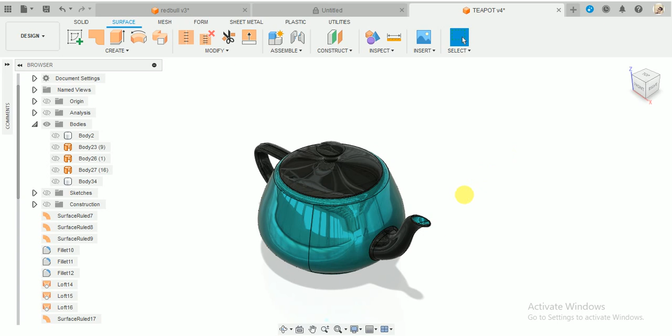In this video tutorial we are going to show you how to make this beautiful teapot assembly in Fusion 360. This comes with the lid and the vessel itself.

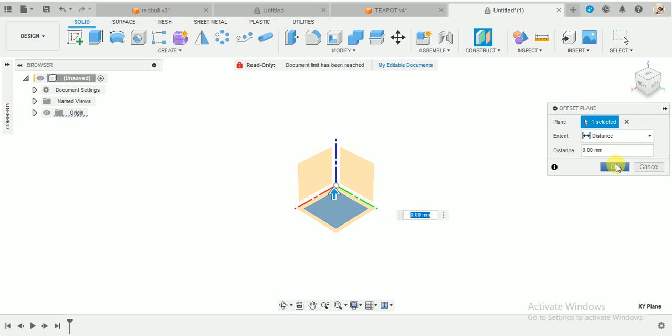This is the origin here. Now we are going to create 9 different planes from the bottom plane. First, go to construction, go to offset plane, select this one. We will create the first plane at a distance of 0 mm. So this is going to be our first plane. Now we can hide the origin.

Now we will repeat the same step. Select this plane upwards and offset it at a distance of 4. Now we have plane number 2. Repeat this step, selecting plane number 2 this time, with the offset distance of 6.

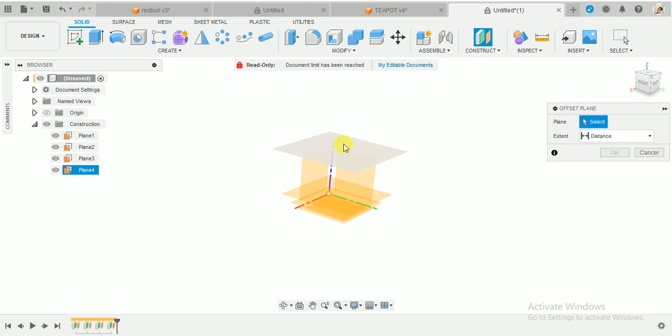Keep on repeating the same step by selecting the last created plane. The fourth plane that we will create would be at a distance of 30 mm, and repeat the same, with the distance for the fifth plane also being 30. For the sixth plane, the distance is going to be 35. For the seventh plane, the distance is going to be 18. For the eighth plane, the distance is going to be 15, and for the final, ninth plane, the distance is going to be 5. Press OK.

Now we have 9 different planes. We need to create 9 different sketches on each of them. To avoid confusion, I will hide all the planes and start with plane number 1. Click on create a sketch and click on plane 1. Now press C for circle and make a circle at the origin with a diameter of 91, and finish the sketch.

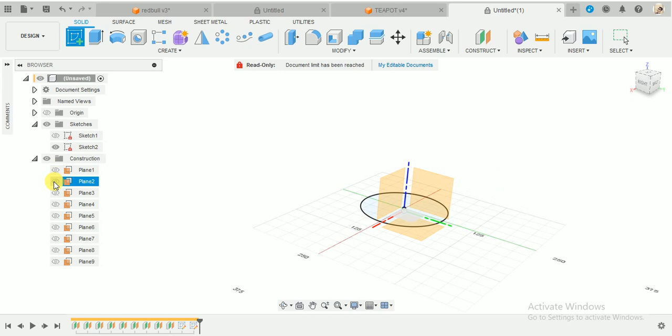Hide this sketch. Now click on plane 2, press C for circle, and this time the circle would be of 143 mm diameter. Finish the sketch again, create a sketch, and this time choose plane 3. Repeat the same step; this time the diameter would be 153. Finish the sketch and hide the third sketch.

Choose plane number 4, press C. This time the diameter would be 200 mm. Finish the sketch. Similarly, keep on repeating the same step; this time the diameter would be 178. Finish the sketch again.

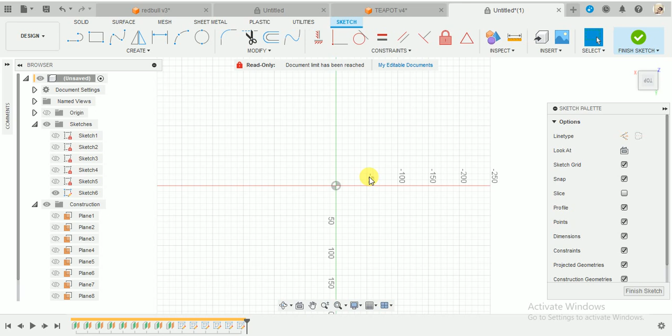Go to plane number 6, repeat, and this time the diameter would be 135. Go to create a sketch on plane number 7, press C for circle, the diameter would be 17. Hide this 7th sketch. Place on plane number 8, press C again, this time the diameter would be 36. Finish the sketch. Now go to the last plane, plane number 9.

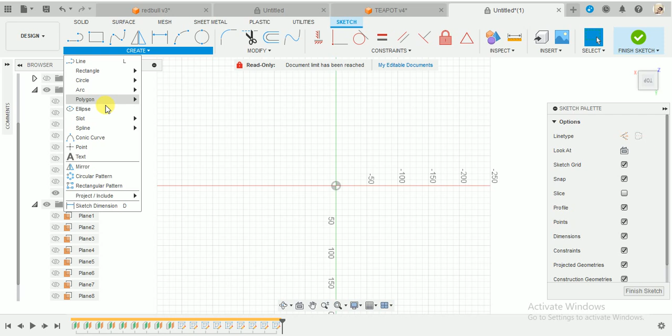For plane number 9, we are not going to create a circle, remember guys. So for the 8th plane we created circles of different diameters, but for the 9th plane we are just going to make a point at the origin and finish the sketch. Now let me bring back all the 9 sketches like this, and you can hide all the planes since it's not necessary for now. Now we have 9 different sketches at 9 different planes; this is basically the intersection, the cross section for the teapot.

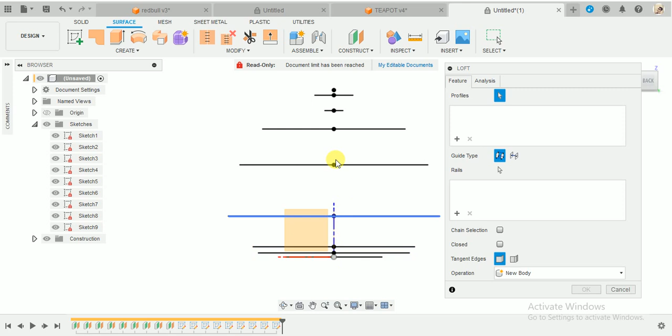Now the magic begins. Go to surface, go to create, go to loft, and to avoid confusion we will not make a loft surface by selecting all the cross sections at once. Instead, we will keep on going one by one. Select the topmost, bottommost, and the circle just top of it like this. This will create a surface like this. Now what you need to do is make sure for the first profile that it should be connected, and keep it for the second plane as well, and make sure it's selected as new body, and press OK.

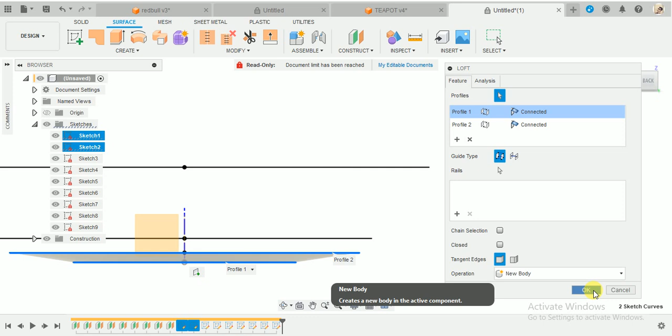Now once done, repeat the same step, loft, for the second and third profile, but this time for the first profile that you have selected here, make it tangent. So the surface being created is tangent to the first surface we created. This is necessary, and you can also play with the tangency. It's up to you how to handle the tangency. This is the line, you can adjust it as you want.

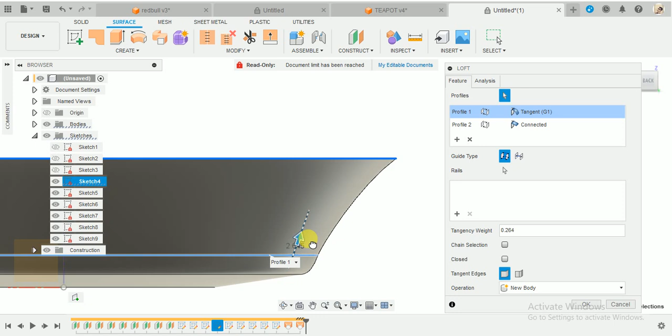Click OK. Now once done, we will repeat the same process for the third and fourth one. Make sure the first profile is again tangent to the last one like this. As I said, you can play with the tangency as you want. I think this seems better. You can edit it at any point.

In your design, as you can see here, the profile is now bending towards the inner portion. Now we are somewhere here. The curvature will go towards the inside. So now what I'm going to do is just click on the last loft and edit the feature.

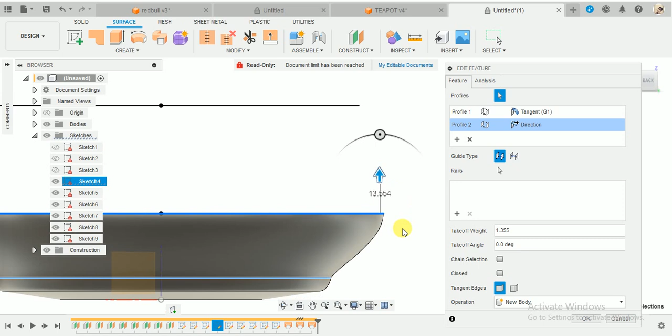For the second profile, the top profile we created, instead of connected, let's select the direction here, and the direction here. This will give another tangent relationship, but with respect to the direction of the arrow. Make sure the arrow is pointing upwards so it provides a beautiful curvature here. Once you are satisfied with the curvature, press OK. This is how it will look.

Now again, go to create, go to loft, and select this profile and this one. Remember, the first profile will be tangent. You don't have to worry about the second profile; it will automatically get tangent to the next surface. Click OK. Now you can see how it is going.

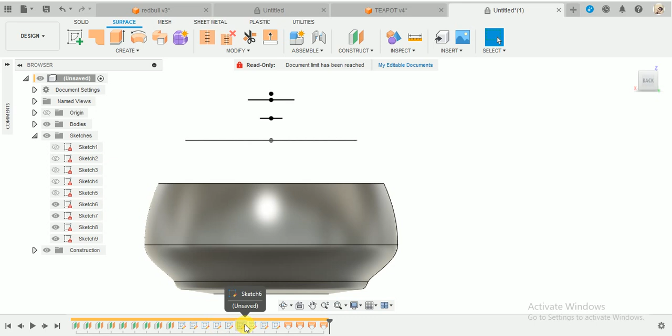You can also, whenever you want, play with the tangency weight if you're not satisfied with the curvature. Similarly, you can edit the diameter of the circles of any cross section if you want to change the design of your pot at any time. So go to loft again, select this one and this one, make sure the first profile is tangent, and press OK.

That's it. So now we are at the topmost section of the pot. We are here. Now the top three sections are for the lid. For the bottom vessel, this is all we wanted for now.

Now we are going to use the stitch surface, because as you can see here, if I go to bodies, these surfaces are not yet connected. They can be seen here as different bodies. So we are going to stitch them together. Select all the surfaces you have created, make sure it's set to new body, and press OK. Now you can see that all those faces have been stitched together. Now we only have one body here.

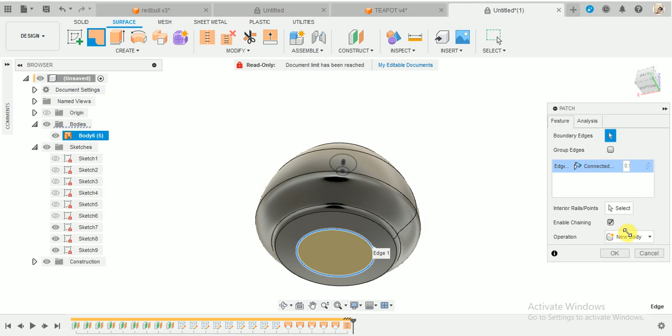Before moving forward, we need to close this hole below. So we will go to create, go to patch, select this one, and click OK. Now repeat the same step. We are going to stitch this patch with this body and press OK. Now we have a single body here again.

Now go to modify, select fillet, and give a fillet here so that we have a smooth surface, a curvature, sorry. It's up to you, you can play with the radius. I think this seems okay. When you are satisfied, press OK. Now that will be our base. The base should be exactly flat. So we are done with the base here.

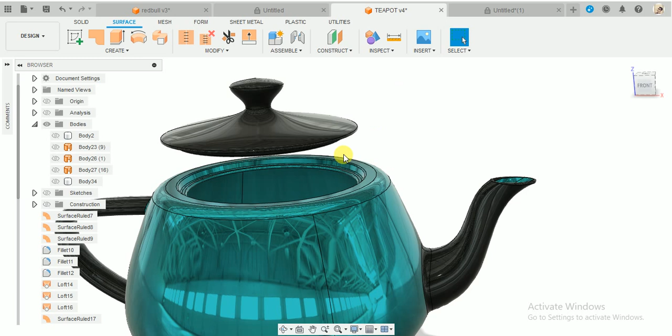Now what I'm going to do is, if I show you the cross section of my top here, you can see we have a small section used for resting this top lid. So we are going to create this cross section in our pot itself. But as you see, we are not in solid workspace, we are in surfacing.

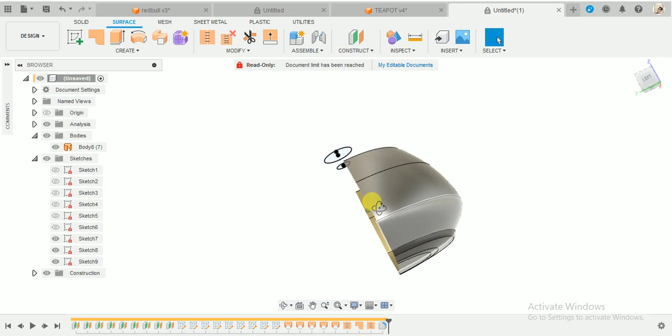So now what we are going to do is go to inspect and create a section analysis, so that we can get a section on the front view, and press OK. So now it's been sliced. I've just done this to get a better view of the internal profile, to see how we are working on the internal profile.

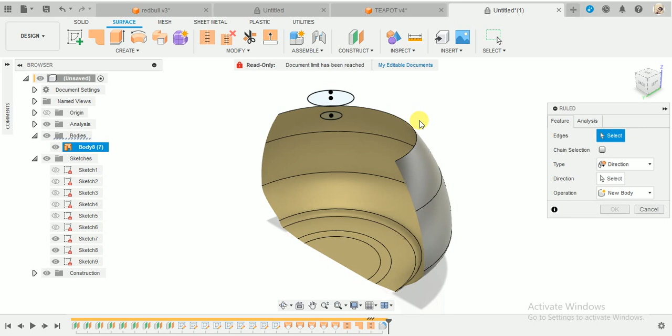So now what we will do is go to create, and go to ruled surface, select this surface, and again click on ruled surface. Select the edge you want to make. Okay, something might be wrong, I don't know. Okay, let me just switch off the analysis.

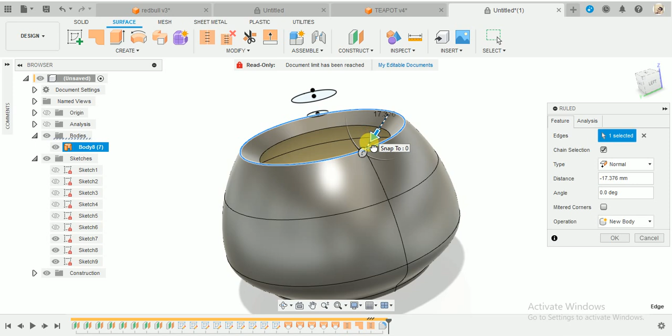I think there might be some issue with the command here, maybe a glitch. Okay, yeah, I get the point now - the direction was selected instead of normal here. So what happens is we will be creating an inside surface, but we will make sure that surface

Okay guys, I don't know why, but this previously worked when I worked on this. So let's choose the tangent. I don't know why in direction it's not generating the surface. Maybe something is wrong with the system, or maybe I messed up something. So let's go to normal only for now.

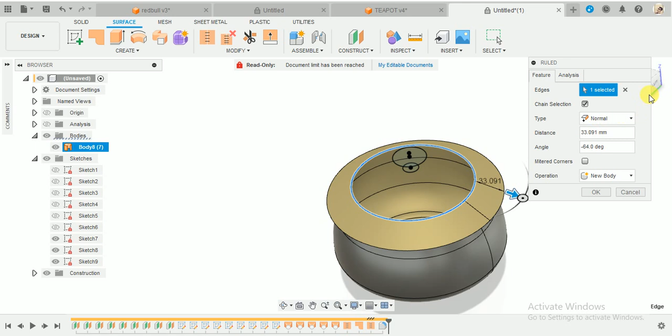Now make sure that we are creating the surface inwards. You can switch on the analysis that we have just created. Now you will know why we have sliced the cross section here. Now go to front plane.

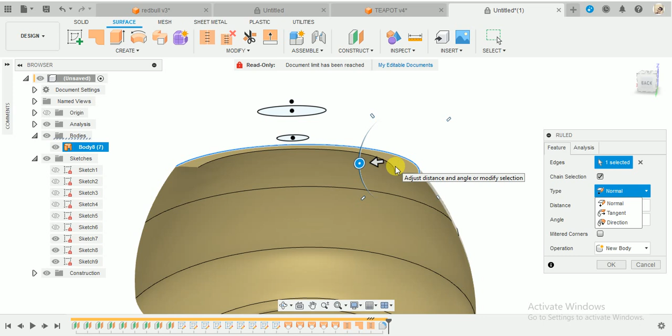Now make sure the angle is just parallel to the ground. So like I told you, I don't know why this direction feature is not working - this is supposed to do with the angle. If this was working, we could select the z-axis or y-axis for reference, and then directly select 90 degrees to that, so we'd be confident this surface is parallel to the ground. But since it's not working, we can check our suggestion.

I think this looks pretty good. Now for the distance, of course I'm not going to use any particular dimension here because this is just up to you, so you can play with the dimension. For now, I think 7 mm looks fine. Since we are in inverse, this would be -7. Let's go with 8 - yeah, -8 looks good.

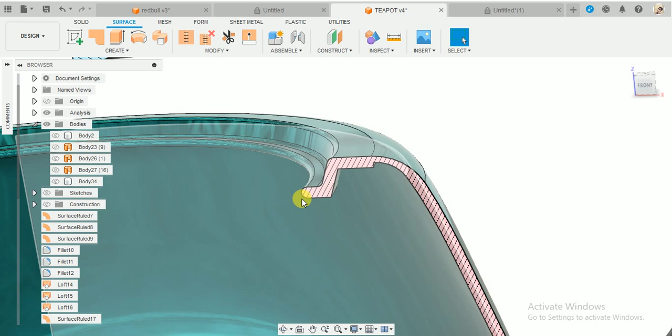Once done, you can always disable the analysis if you are getting confused here. So we have a surface here. Now again, if you look here, we will go downwards, and then create another step so that the top lid could rest here.

So again, for that, we will go to create, go to ruled, select this one. This time the angle would be downwards, and make sure to give it a little bit of draft, instead of making it 90 degrees, give it a little draft. You can also play with the length. Let's say we should go with -6.5. Seems okay, yeah this seems okay, and press OK.

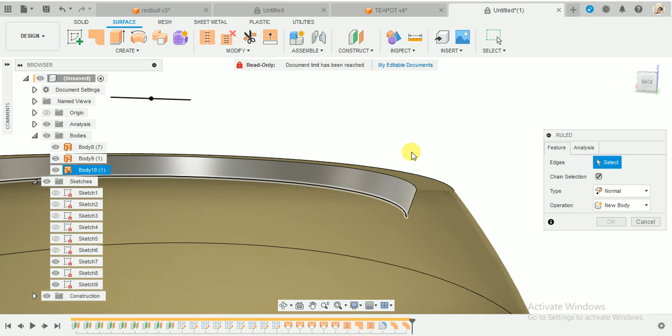Now we will create another step. Go to create again, go to ruled again, select this one. Again do the same step. This time again we will be doing the step at 90 degrees, parallel to the ground. Let's see if that direction feature is working this time - I'm not quite sure whether it will work or not.

Oh yeah, it's working. Now I don't know what happened previously, but now you can see the direction feature is working. We have given the z-axis as reference direction, and we have created an angle of 90 degrees. So now we are sure that our surface is 90 degrees to that.

Now as for the distance, you can see it's not that much, so we will go to edit feature and make sure the angle is 90 degrees. You can play with the distance here. So I think we will make it -5 mm. Yeah, 5 mm would be okay, and press OK.

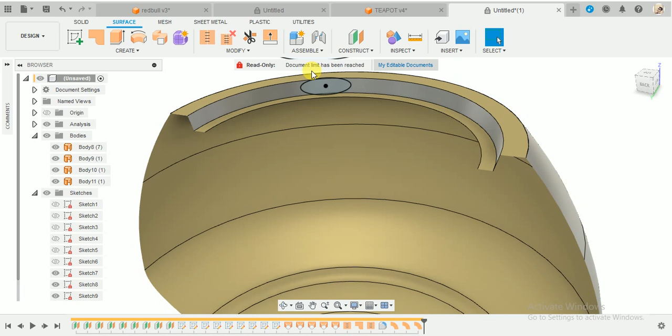Now we can switch off the analysis for now. This seems okay. Once you are satisfied, you can stitch all the surfaces, all 3 surfaces that you have created with the original body, and click OK. Now we have a single body again.

Now for the next step, before moving on, make sure you give fillet to all the edges that you have created. Again, I'm not going to give any dimension, it's up to you how much smooth you want. I think this seems okay, and similarly do this for the inner edges as well.

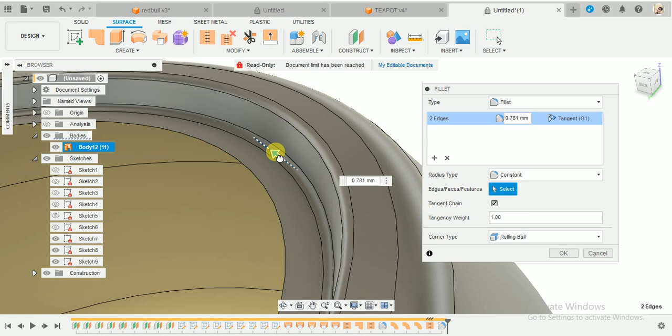Yeah, I think this 0.781 seems okay, and press OK.

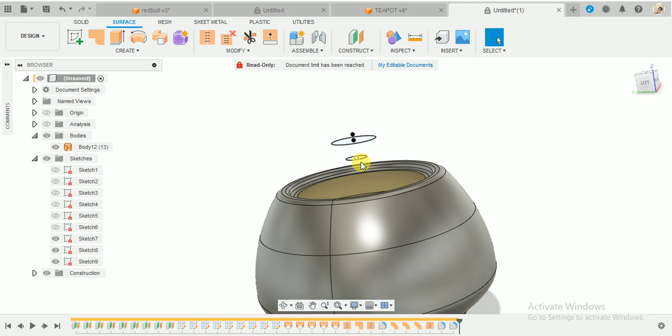Once done, we will start working on the top lid. Now these are the 3 sketches that we have created from the total 9 sketches. Make sure this is the third from the last, so we are going to highlight the 4th from the last. This one, this sketch was the topmost section, so basically this will be the bottommost section for the top lid.

So now what we are going to do is select loft, select this one and this profile like this.

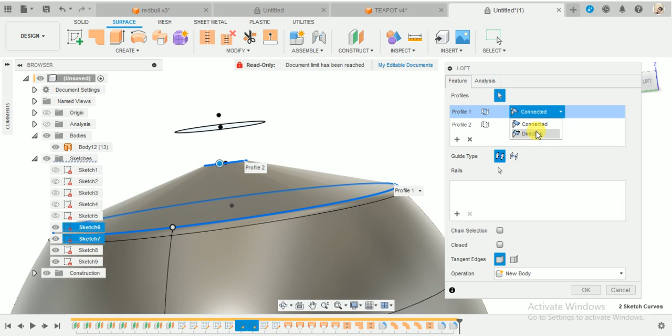Now for the first profile, instead of tangent, because there is no surface below it, we cannot choose the tangency. So we will choose the direction instead, and again we have the arrow, so you can play with the cross section as you want. This seems okay, this seems fine to me.

Similarly for profile 2 also, we will be selecting direction upwards, and you can also play with the profile here. This seems okay. I'm not going to go in detail.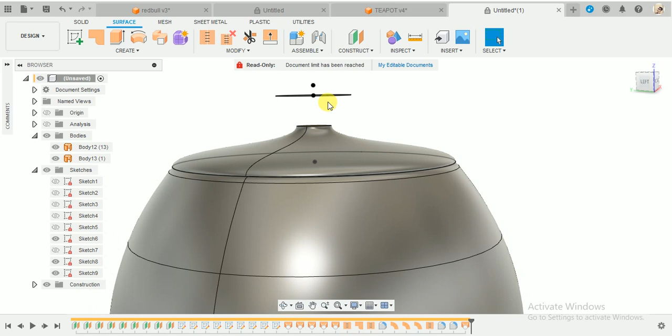Let's repeat the same step again. Go to loft, select this profile and this one, and as I told you, the first profile is going to be tangent because we have a surface below it, so make it tangent. For the top portion, I think I will keep it like that, or let's try direction. Let's see how it looks. Yeah, this looks fine, it's up to you.

So you can again play with the tangency here. Once you are satisfied, press OK.

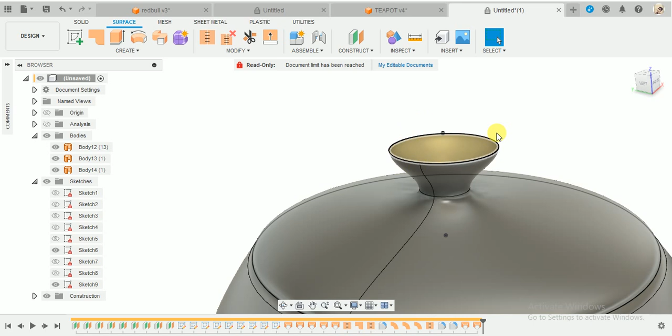Now for the last portion, for the tip that we are going to create here, as you notice we have not created any sketch because we need to close the loop here. So go to loft, select this profile, and instead of selecting the upper profile, select this point and it will close the loop. Again, select this at tangent and play with the tangency as you want.

The second would be the sharp or the point tangent. It's up to you, so I would recommend doing the point tangency, as this will create a much smoother surface than anything else. Again, if you switch to side view, you can play with the tangency weight here. When you are satisfied, click OK.

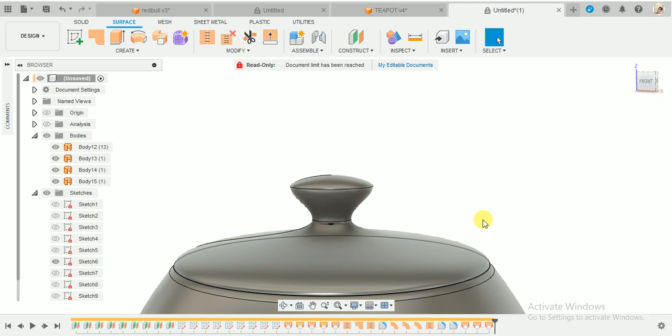Now you see we have our lid here, and we have our base surface, our base body. So now we are going to stitch the top three surfaces that we have created, and we have two different bodies. Now for the surface, as you can see here, we will again be creating some textures here in order to make sure it fits on top of that.

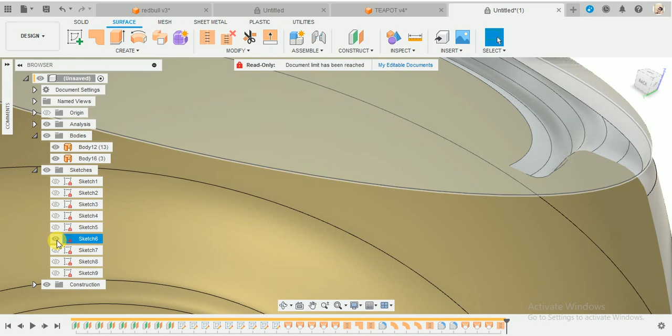So again, go to analysis and switch on the tangent section analysis that we have created. For the sketch, you can hide it, we don't require them for now. Now again, we will repeat the same step as we did for the bottom part.

So we will again go to create, go to ruled surface, select this face, and let's see if direction is working this time. Hopefully it works. I think it's working. Yeah, direction is working, so we are going to make the angle 90 degrees. Let's switch to...

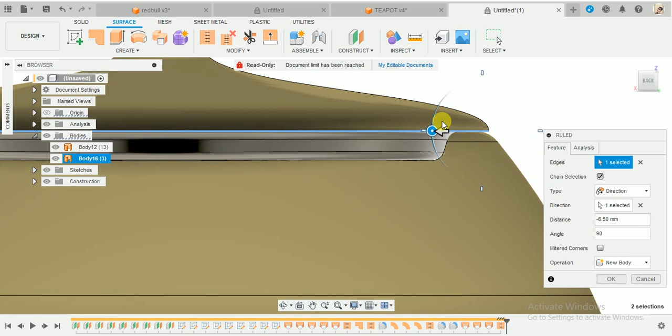You can make sure it does not collide with the surface that we have created for the bottom one. I think this seems okay. Just make sure there is some gap between, just for clearance, if you are planning to 3D print or something like that. So make sure it goes like this and press OK.

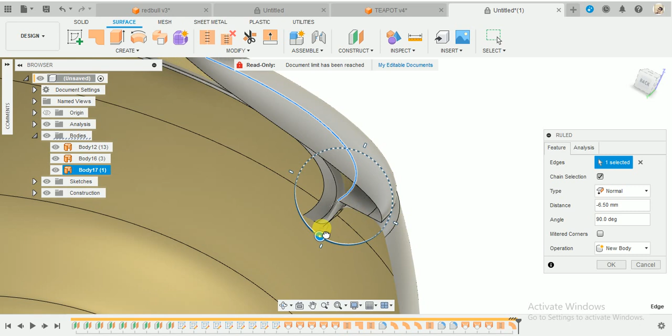Make sure it's a little bit extra, and go to create again, go to ruled surface, select this one. For the direction, it is not necessary, just go to normal for now because we are going to make an angle surface. Doesn't matter. Go to side view.

It will give you a nice idea of how long the surface should be. Now once done, you can play with the length. You can choose it till here, or you can leave it like that only. So I will leave it till here and press OK.

Now select and just hide the bottom one for now, and now you can see that we have created the inner section here. Now go to stitch, select this surface, this one, and the top body, and press OK. Now once satisfied, you can switch off the analysis mode for now.

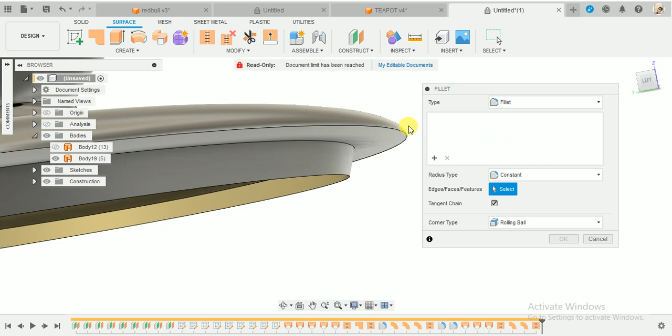Now we have a body here again. Now let's get to this body again. We will give it some fillets. So it's not about the dimension, it's up to you. Let's go with this fillet.

Repeat the fillet for this edge. Just make sure it does not collide with the bottom one. So let's switch on the analysis once more. Yeah, this seems fine, and once you are satisfied with the radius, you can press OK.

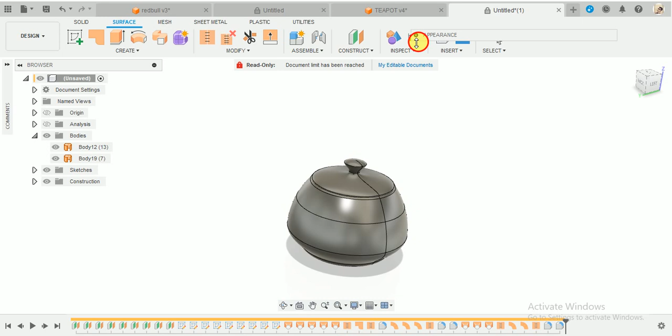Now just to avoid confusion, let's color those bodies. So press A for appearances and just select any random face so that we don't get confused. Let's go for... we will go for paint. Where is it?

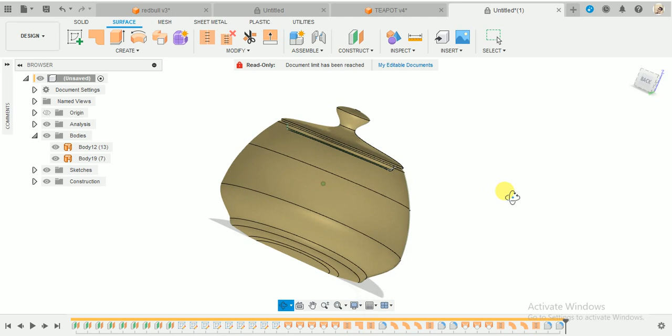Let's go to glossy, make the bottom one green and the top one blue, just to avoid any confusion about which surface we are working on. Now you might know that we are not in solid state yet. We are yet to create the handle, although the top portion is complete. Let's just hide this, unhide this.

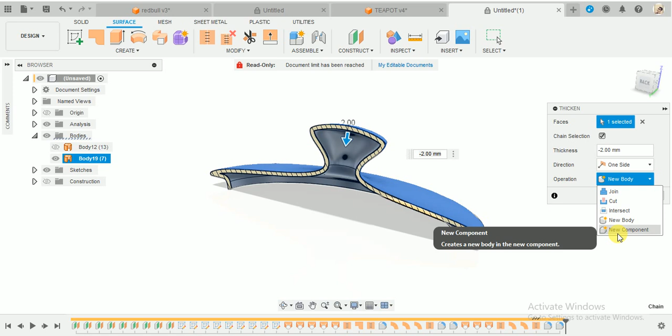As this is complete for now, we don't need to create any handle or opening for it. So we will create the thicken command, because we need to make this in solid state. Go to create, go to thicken, select this one, and the thickness will go inwards, not outwards. The thickness I'm going to choose is -2 mm. Negative means it's going inward, and this would be our new component instead of a body.

As we have finalized this component, we will select new component and press OK. Now we have a new component here. Just rename it now, rename it to top lid, and OK. Now you can switch off the analysis. Now this is in the solid state. The body here was in surface state, but now we have created it in solid state with 2 mm of cross section thickness.

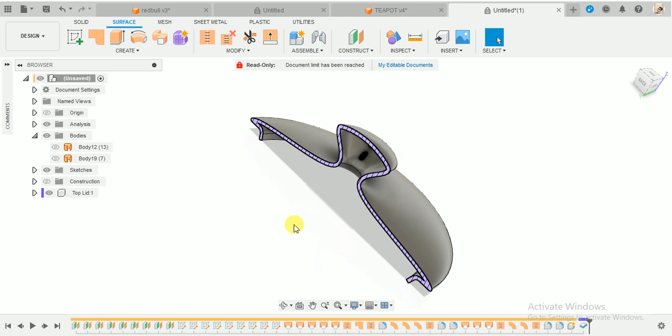So if I just switch on the analysis again, you will see the hatching here. Hatching represents that this is a solid body now. So this was the top lid. Now we will hide this and start working on the bottom one. Again, just hide the analysis for now.

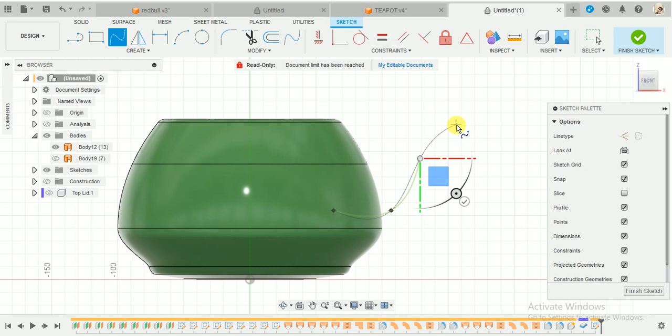The next step is to create this handle, and this - I don't know what it's called - this is for the pouring purpose. Again, I will not be using any particular dimension here, this is just based on your imagination. So we will create a sketch on the front plane this time, like this, and we will create a spline somewhere here. It's up to you. If you know, this should go like an S shape.

So now I created a random spline that we can always play with its shape later. It's up to you what kind of spline or shape you need to create. As we are working on a parametric design system, every step we make is getting tracked here in the design tree.

So we can anytime change the design for this spline here to get suitable results. It's up to you, you can modify it anytime you want. Let me just take the reference from here. I think this is looking good - for now, let's see if it's looking good or not. So we will finish the sketch.

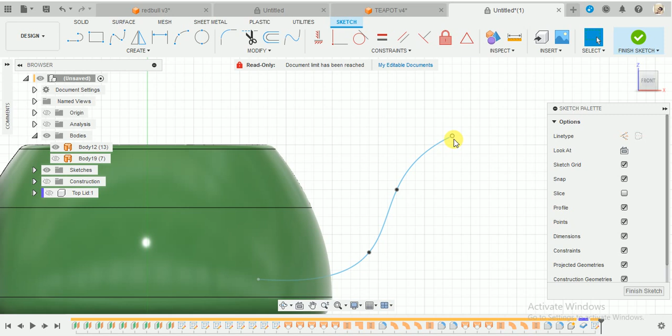Now once you are done with your spline, let me just... let's make it like this. Once we are done with the spline, we need to create that intersection, that cross section area for this as well. So for that we are going to use plane along path.

We will create 3 planes. Make sure construction is on. One at the starting of the spline, the second plane along path would be at the end, and of course the third would be somewhere in between. It's up to you, so let's choose here, or here, yeah, somewhere here.

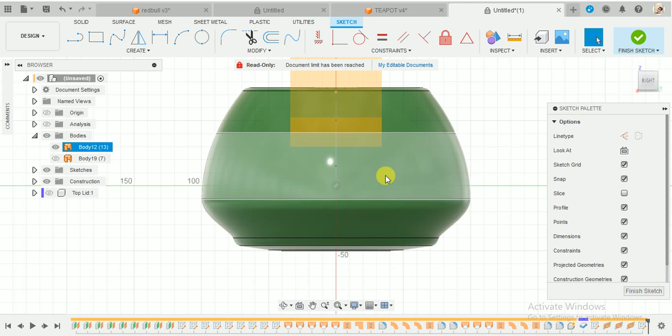Now again, we will start with creating the sketch at the first plane that we have created, like this. So just rotate it. Yeah, this seems to be the origin. I think that is it. Okay, so this is the origin here.

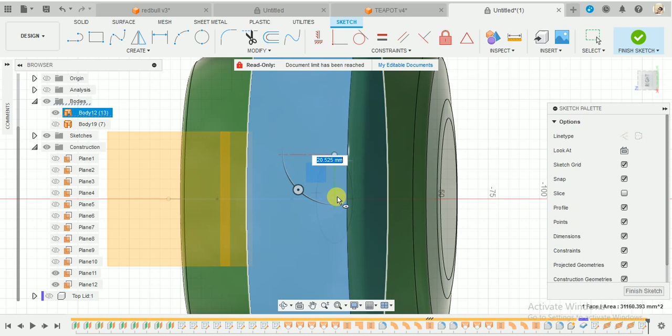What we are going to create is an ellipse here from the origin. Let me hide this body, and make sure - there's this difference between minor and major, what you call minor length and major length, I don't remember the exact term, but I think this seems okay. I'm not talking about any specific dimension here, it's just pure imagination, it's all up to you.

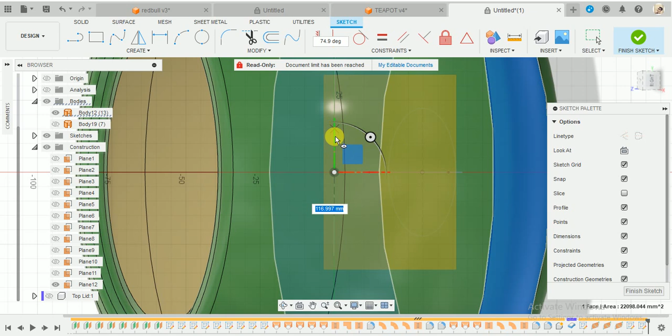So do the same for the last step. Create, go to spline, go to ellipse, select this point. As this is the top version, this should be much smaller. I think this seems okay, and finish the sketch.

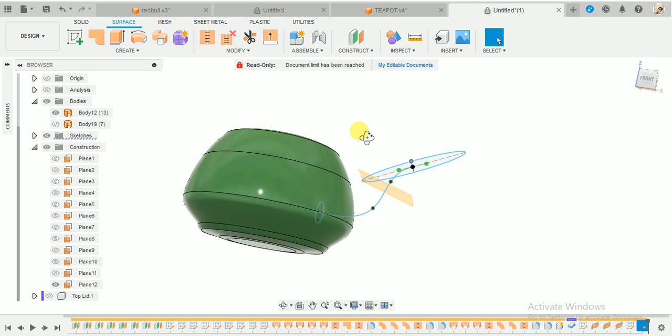Okay, I think I have made the sketch on the wrong plane, so just delete this sketch. I think I chose the wrong plane.

Select this plane. Yeah, I have chosen the wrong plane for that, that's why it was acting weirdly. So go to ellipse and select, and make a smaller ellipse like this, and finish the sketch.

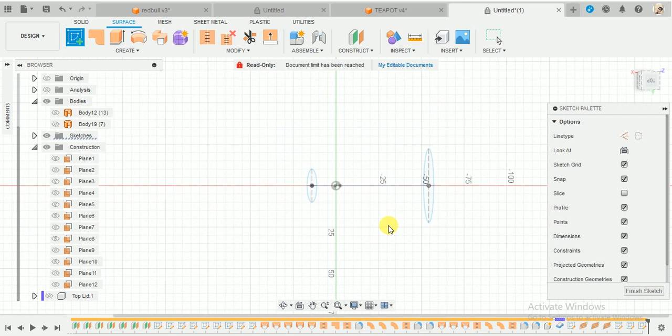Yeah, this seems good. Now for the middle plane, we will do the same. So this is the origin. We will go to ellipse and create a slightly bigger ellipse here. Like I told you, we can change the shape of these ellipses anywhere, anytime we want.

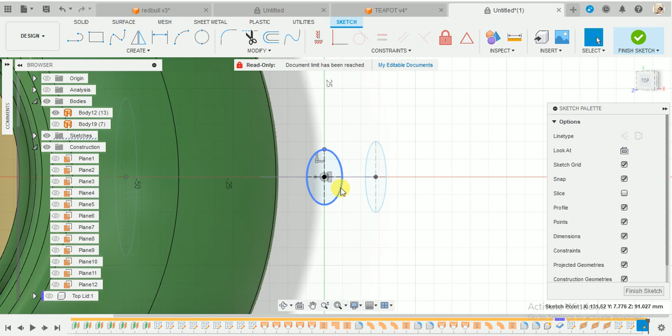If I just switch on this body, they are looking much more wider to me. So let's edit this, because this is looking much more wider. I think, yeah, this would do. Let's make it a little more. Yeah, I think this would do. And for the top portion also, just edit this as well.

I think this is looking good, but I think this is much more bigger. But let's see, we will change this after doing the loft. We will go to create again, go to loft, and just hide this body for now.

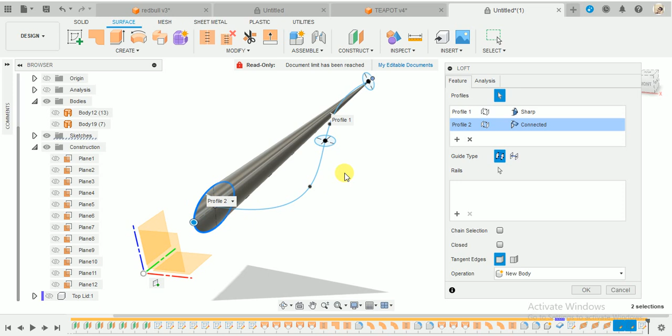For the first profile, it's going to be this. Okay, the second point is already selected. This is going to be first, this is going to be second, this is going to be third, and this is the guide type. So instead of guide type, we will select the select option, the center line, and for the center line we are going to select this, like this.

So again, you can play with the direction, as I told you previously. Also, you can play with direction as you want, if you want to make any changes in the dimension. Similarly for the last portion also.

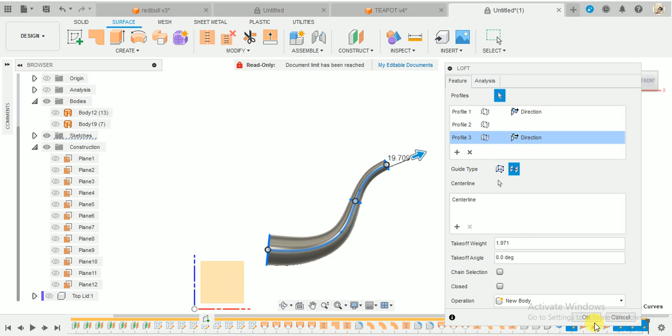But this is looking fine to me for now. Let's press OK and bring back the original pot. So if you are satisfied with the shape, and if not, you can anytime change the dimension of the sketch, and this will automatically update the loft.

As you can see here, the loft has already been updated accordingly. Similarly, the spline, if you want to play with the shape of the spline, that would also work. And finish the sketch. So here we go. Now this is looking fine.

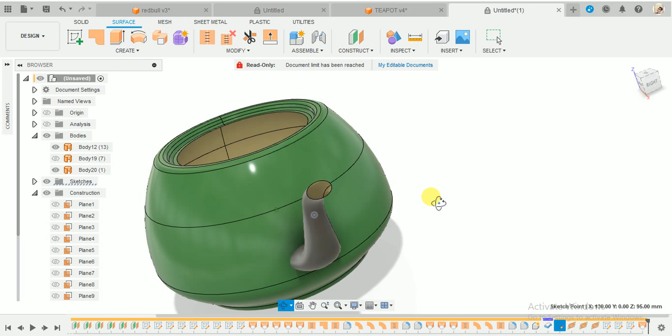So the next step that is left, one step is left, but that we can create at the later part of the video. Now we are going to make a trim. For the trim command, those who are not aware, there is a separate video available on the channel, but let me try again because this command is kind of confusing.

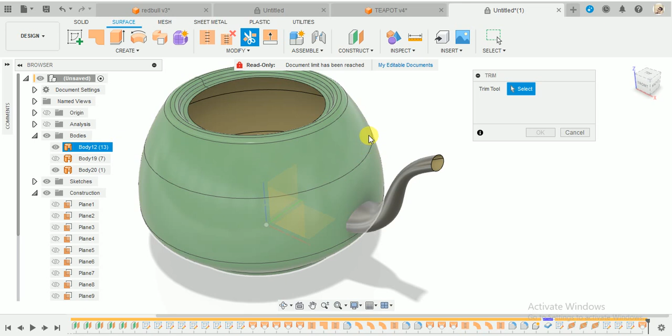You can see here this particular section is intersecting with this body. So we are going to trim the unnecessary part and make sure it joins with this green main body of the teapot. The first thing it is asking us is to select the trim tool. So first we have to decide what we are going to trim first, whether the body or this pouring funnel.

Let's call it funnel to avoid confusion. So let's start with trimming the funnel first. If we are going to trim this, then obviously this is going to be our trim tool. So select this as trim tool. Now it does not show us anything else to select, so this is going to be a trim tool, meaning this portion is getting trimmed.

But we have two sections here, one is outwards, one is inwards. So the section that we want to delete, we will select that section and not the one we want to keep. We want to delete the inner section, so we will select the inner one and press OK. You can see it has been trimmed.

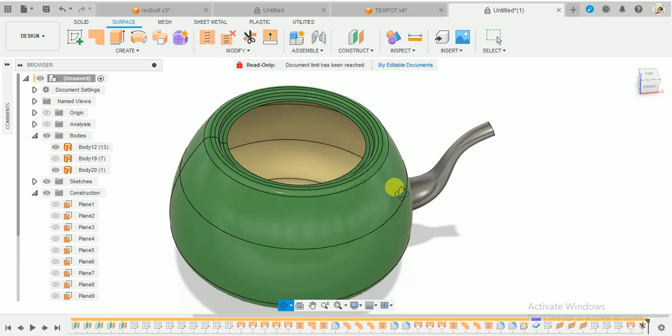So just keep it like this. Again, we are going to stitch it, and this one, and press OK.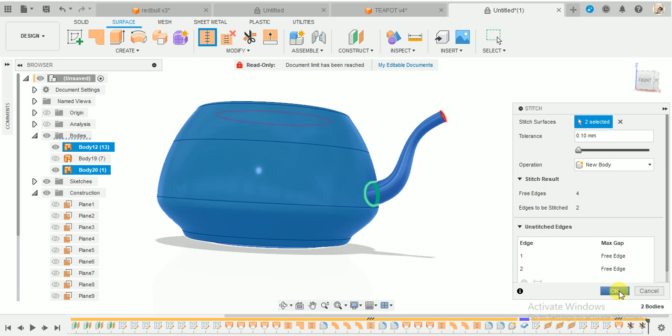Now we are going to again, like we did previously, create a fillet here. Just like before, we don't have any specific dimension. It's up to you, so once you are satisfied with the dimension, you can select OK.

Also, if you are still not satisfied with the design of the funnel, you can anytime change all these splines and all the cross sections. This will automatically get updated at any time of the design, even after finalizing the final design.

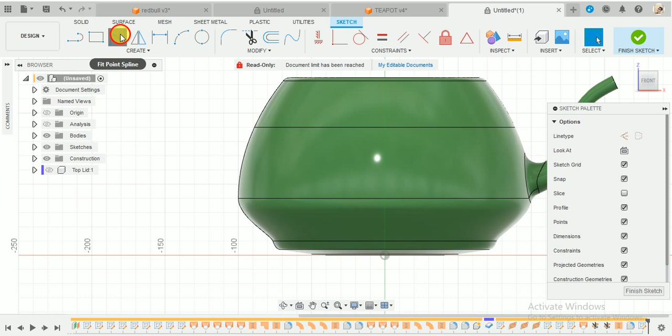Now the only thing left is to create the handle. For that, again we will go to the first step, and like we did for the funnel, we will not be using any particular dimension. We will just use some random lines, and you can play with the shape.

I'm not taking any dimension. This will take time, and it's all up to your imagination. So once you are satisfied that this seems good and can be done, then you can finish.

The sketch should repeat the same step, but this time the cross section would be the same in the handle. So we are only going to create one plane at the starting. Then hide this body for now, and create a sketch on the second body.

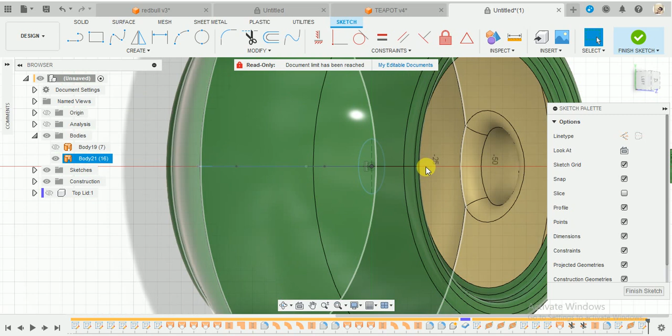We will go to ellipse and create an ellipse. Just to get a reference of whether the handle seems okay or not, you can switch it on and play with the size of the handle.

It's up to you. When you are satisfied, click finish sketch, and instead of loft, this time we will go for the sweep command. Select this part as profile, and the path would be this one. This will create a handle.

We'll create it as a new body like this, and oh yeah, this looks actually pretty sick. Yeah, this looks good the first time. Now what we are going to do is trim this body again.

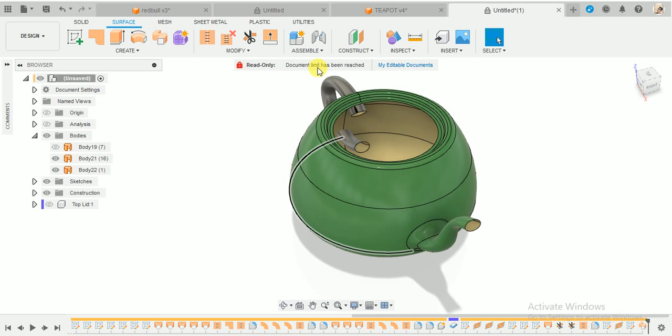So trim is going to be our trim tool. We are going to remove this one and this section, and press OK. Now for the trimming of the next part, I think previously this was not working, maybe there was some glitch, but let's repeat the same step here and delete it.

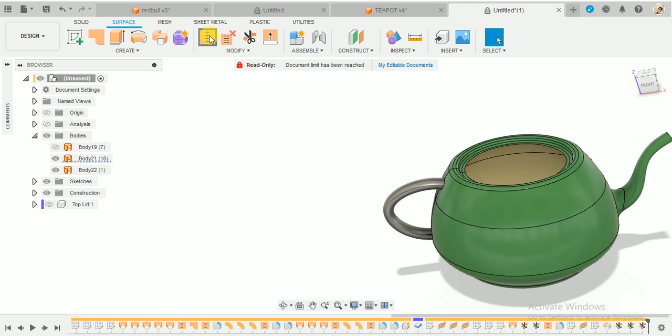Okay, yeah, this looks good. Now once done, go to stitch, select this one and press OK. Again go to modify, go to fillet, select this edge and this edge, and increase the radius as required. Once done, press OK.

Now we have one body. We do not require this body because we have already created it in solid. For this step, we are again going to go to create, go to thicken, and click on this one.

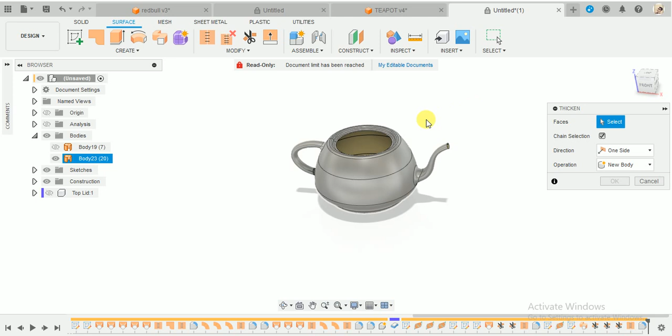We will again create an inside thickness of 2 mm. As you can see, the thickness is being made inside, and this is going to be our new component because we have finalized the design. Once satisfied, press OK.

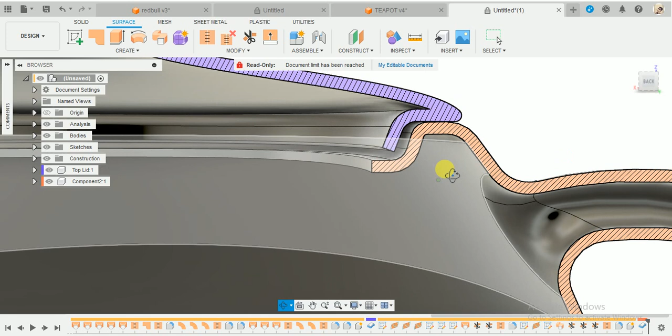This might take some time to render. Now hide the body. We have a component here and a component here. Switch on the analysis and you will see two different bodies with a uniform thickness of 2 mm inwards, making sure it is not colliding. I think this is pretty sick.

Now, in order to... press shift and N, and Fusion will automatically provide a color distinguishing. Now the only thing left is...

to make a cut here. So I will be making a random cut here. Go to solid because we are in surface state right now. Select this one, select this profile, and we will cut it symmetrically on both sides like this.

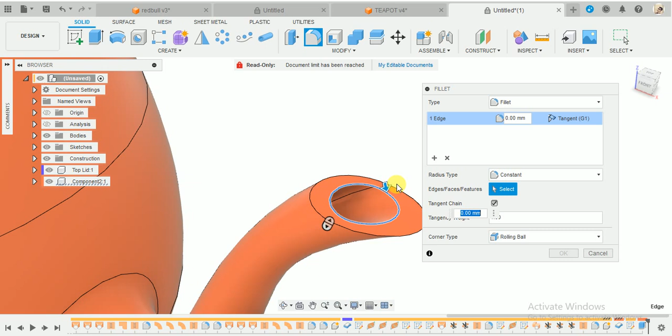And go to fillet, select this face and this face, and give it some fillet. Let's do it one by one. I think that would be...

The thickness was 2, so I think 0.5 mm radius would work here, and fillet on the outside, 0.5 would also work. Let's make it 1. Let's try 1. Yeah, this seems much, let's try 0.8. Let's go for 0.8. Okay, it's not necessary actually.

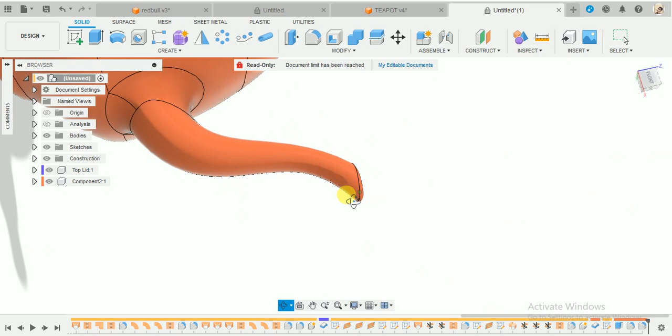So yeah, now we are done. And again, I told you, if you're not satisfied with the design of this funnel, you can change it. This was the sketch; you can change it anytime in the design. Now we have a solid body.

Both are finished. Now the only thing left is color. Press Shift+N to disable automatic coloring, press A for appearance, and you can go for any option. I saw there was a mirror finish as well, but I would like to go for ceramic, but I cannot find it right now. So...

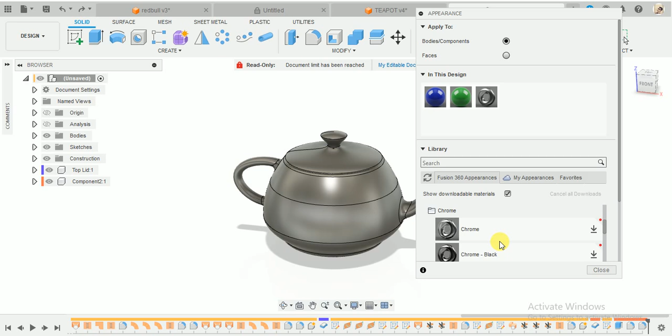let's go to Chrome and Chrome again. Now we will duplicate this part and edit the color. It's up to you. You can edit the color as you want for the top portion as well.

You can choose whatever color you want. It's up to you. Once you are satisfied with the coloring, you can even do this for the handles like this and for this portion as well. Actually, this is looking quite great.

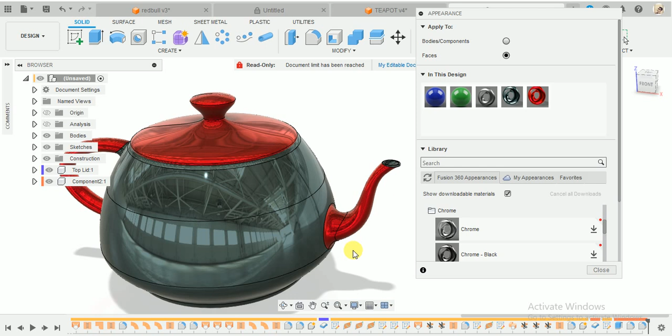Yeah, so that was all, guys. Hope you enjoyed the video. So this is the tutorial for how to create this beautiful teapot in Fusion 360.